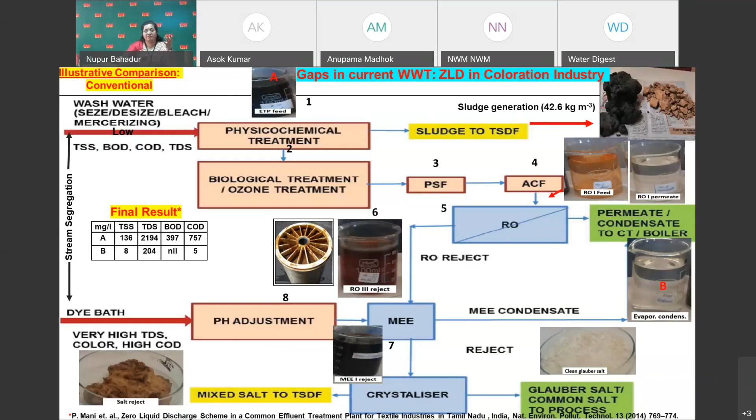So with this, the second issue of wastewater currently is water reuse. Many states have come up with water reuse policies, and now we are coming up very soon with the national policy on safe treated water. So what is it? Water reuse, we want to enhance. So the requirements are very stringent. You see, industrial treated water reuse options.

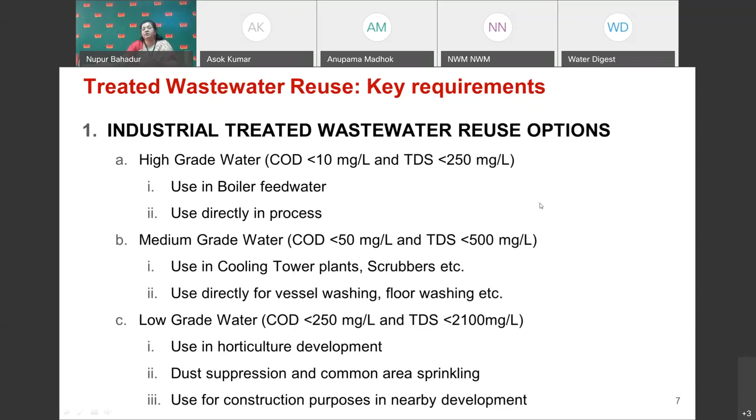If I start from low grade, these are the parameters: COD, chemical oxygen demand, and TDS should be this much. And then it would be applicable for horticulture, suppression, construction, and all. If we improve the water quality, reduce COD to less than 50, reduce TDS to less than 500, we are able to get water for cooling towers, scrubbers, directly for vessel washing, floor washing, etc. And if we further improve the water quality, make it high grade by bringing COD less than 10 and TDS less than 250, we call it high grade water, which could be used as boiler feed directly in the process.

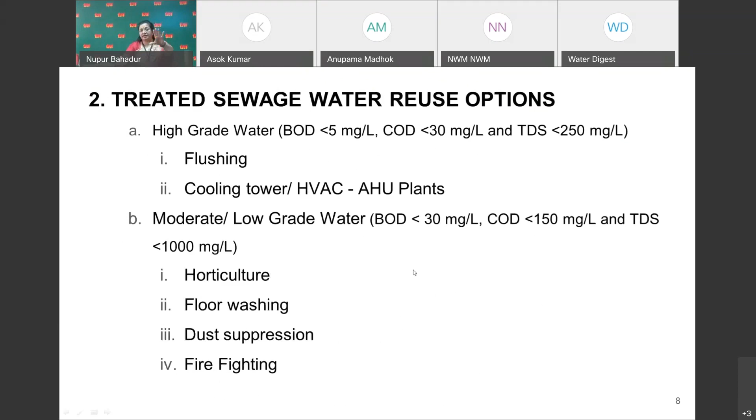Second is from sewage. Sewage water, when we look for the reuse option, again we have two options. One is the moderate or low grade water, where BOD is less than 30, COD is less than 150, which is good for use in horticulture, this and that. If we further improve the water quality to BOD less than 5, COD less than 30, we get water for cooling towers and high-end applications. So this is the target. So those were the challenges.

This is the target. And finally, I have just summarized with my understanding what we need to improve water reuse. First of all, we need to remove hardness and TDS. Second is to remove COD and total organic carbon. And third, to remove dissolved organics, the POPs or the contaminants of emerging concern or the micropollutants. Now, how well are we prepared? The next question is, having these two issues in front of us, how well are we prepared?

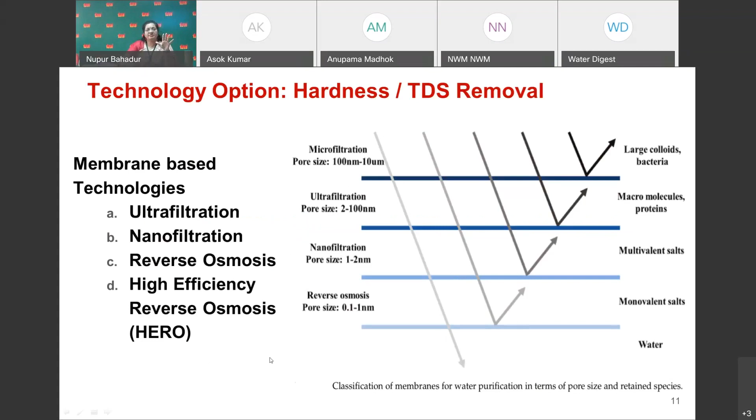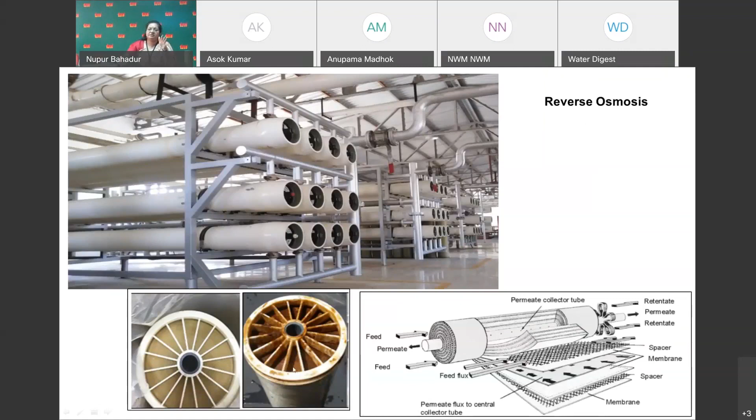I'm an optimist, and I would say yes, we are prepared. We have technology options for hardness and TDS removal. We definitely have membrane-based technologies, which are working very well. And we have all these 4 with us. And you can see here these are the pore sizes, and this is the filtration. We have things in place. We are ready for this. Here, this is just to show the audience what RO systems look like. These are huge structures, a large number of RO membranes are operative. They have spiral winding. And this is the issue, the clogged and the choked membranes as a result of treatment.

Next is, again, reject management. Again, as I said, we are prepared for reject management. We have evaporators, we have technologies. We have 3 types of evaporators. To evaporate the reject of the membrane processes and recover salts, we have multi-effect evaporators with ATFD. These are called thin film dryers. Again, you see huge structures, and these could be affordable for large scale industries or CETPs, and just see the amount of energy and the footprint they require. And this is the science behind it.

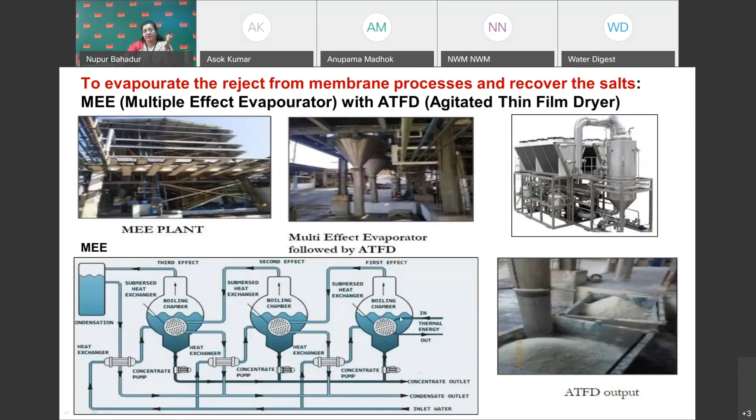Then what happens when you evaporate the rejects? You have to recover the heat which is generated in large amounts from the steam in the MEE. To recover the steam, we have MVR, mechanical vapor recompressor. So this is the basic idea behind an MVR. And again, you can see the huge structures with MVR.

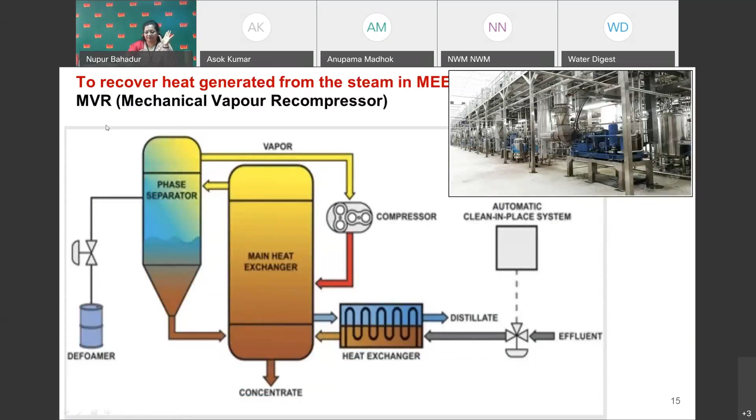Now coming to the organics, third category. To remove organics, the COD and TOC, we have biological treatment technologies in place, and they are running well. Again, I would say I would compliment the current system what we have. But now when we talk of enhancing reuse or improving the system, where comes the role of advanced oxidation processes?

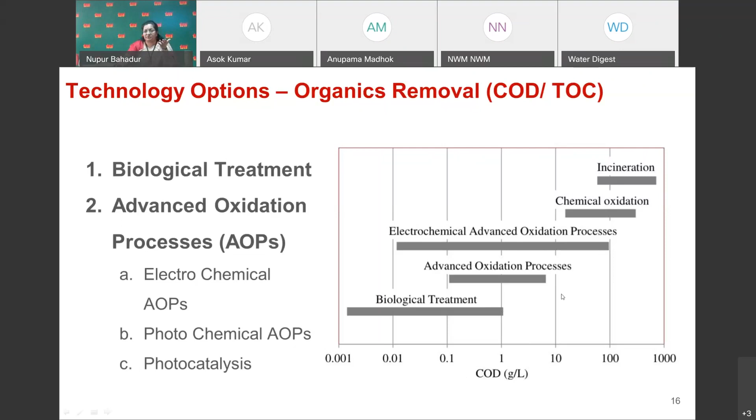You can see here the COD. To remove large amounts of COD, we have to go for the advanced systems. So here comes the role of advanced oxidation to enhance water reuse. And here is the scope. This is our trademark, which is accepted, and patent is pending.

Now, what is an advanced oxidation process, an AOP? AOP is any technology or any process which generates hydroxyl radical. So depending on the source, if the source is chemical, we call it chemical AOP. If the source is photons, the light radiations, and the chemicals involved, it is called photochemical, like the Fenton, photo-Fenton, H2O2, UV/H2O2, ozone, and photoozonation.

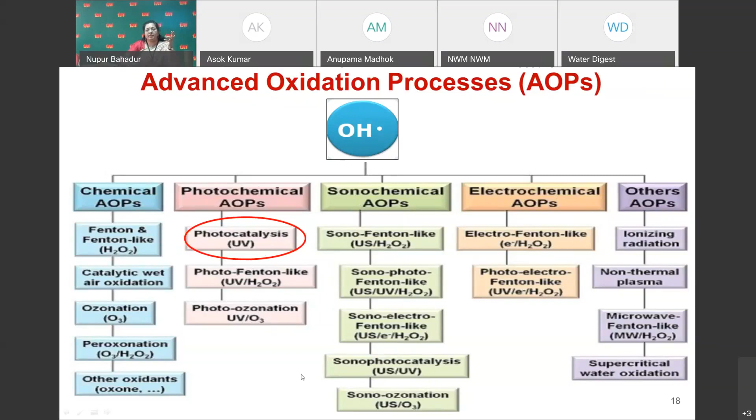And today, as a third stage of my research, so to say, I utilize both my prior experiences of PhD in photochemistry and photocatalysis and my postdoctorate in nanotechnology. And at this stage, I am applying both my experiences in water technology for treatment of wastewater. So here the science is very simple, that we make use of nanomaterials, very specific kind of nanomaterials.

They are semiconducting in nature, and in the presence of suitable UV light radiations, it is a natural property of a semiconducting material we all are aware of, that in the UV light excitation, these electron and hole pairs are generated, and in the presence of oxygen, water, hydroxyl radicals are generated, which means in situ, we are generating these hydroxyl radicals. To generate this radical, we are not using any externally added chemicals for the purpose.

For ozonation, you need ozone. For any chemical, photochemical process, you need a chemical along with the photons to get this. The beauty of this work is that if we switch off the photocatalytic reactor, the reaction stops. When we switch on, it starts. No incubation period is required for this process. And it is ultra fast. So this is the benefit and the beauty of this process.

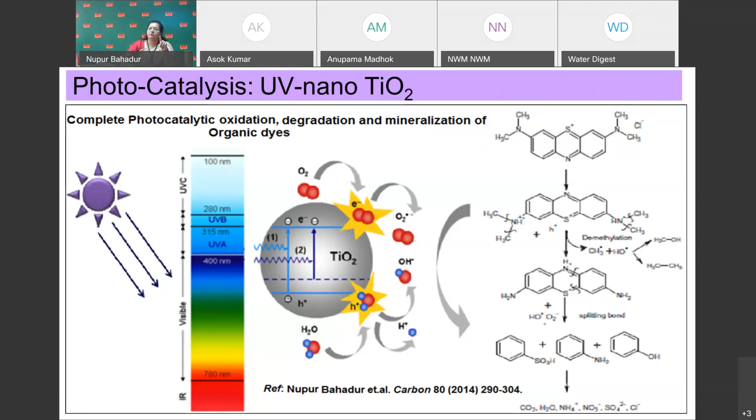And the hydroxyl radicals, this is one example from my own publication in Carbon, when they are used for oxidation, what do they do? They are oxidatively degrading the complex dye molecule or any pollutant molecule into small molecules. And ultimately, it is leading to mineralization. You can see here, the complex molecule or the pollutant is broken into minerals. This is where our current treatment technologies are lagging, where they are not treating the pollutant, they are converting the pollutant from one form to another.

Now, we have applied this simple science in the real wastewater treatment scenario. And first of all, I would acknowledge that this technology was developed under the DST Water Mission, Water Technology Initiative Program of the Ministry of Science and Technology, Government of India, through a funded project from just 2017 to 2020. So it's a new effort, a novel effort done in recent years only.

So the novelty features: first of all, we similarly have primary, secondary, and tertiary treatment, because science remains the same. But the only thing is we have to think differently. So the two novelty features are that we have involved advanced oxidation, AOP-based nanotechnology, in our secondary treatment stage. And second most important, the innovation is that no biological treatment is taking place.

So direct treatment involves the first stage. Here, the innovation component is we are not using those alum and ferrous salts. We have come up with very novel formulations, proprietary materials, to reduce the TSS up to 90 to 95% right in stage one. And once the matrix is clear, we are applying nanomaterials, giving contact time, aeration, and passing through a photocatalytic reactor having a suitable geometry, radiation, and all.

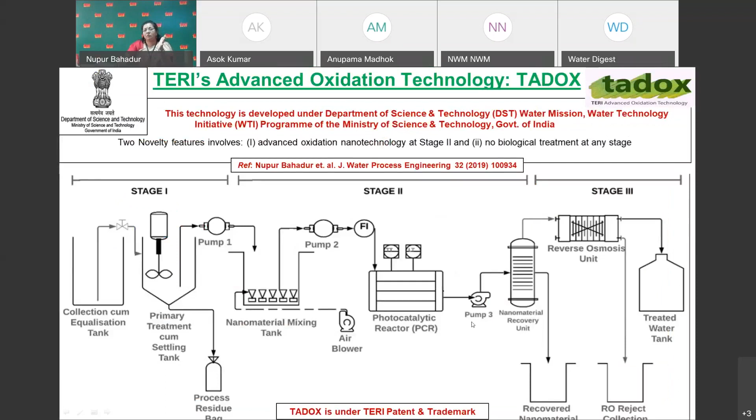Based on this, the benefits for TADOX: first, it's a clean and green technology, because we are utilizing the intrinsic property of nanomaterials to generate radicals. No external added chemicals are used for this. The hydroxyl radicals generated have a high oxidation potential, and this is 10^9 times faster than oxidation through ozone.

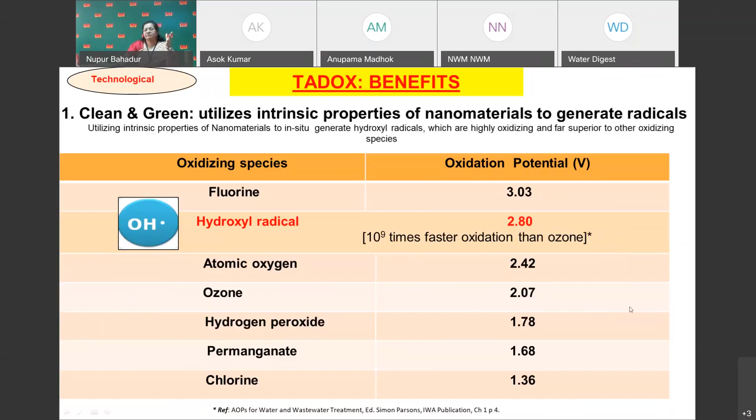So you will see in our treatment results, the treatment is taking place within a few hours. This is the first benefit. Second, we are able to completely oxidize, so complete mass balance is achieved - less sludge, no secondary pollution.

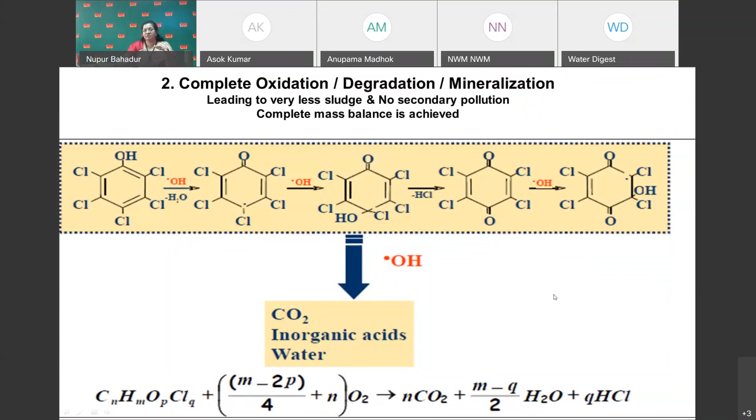Third, since hydroxyl radicals are non-selective, they can target a large number of molecules, which means the same simple technology could be applicable to a large number of effluent streams from different industrial sectors. So this is another benefit.

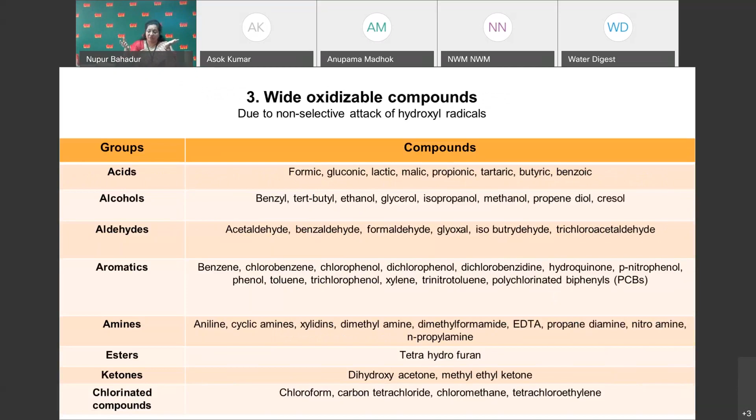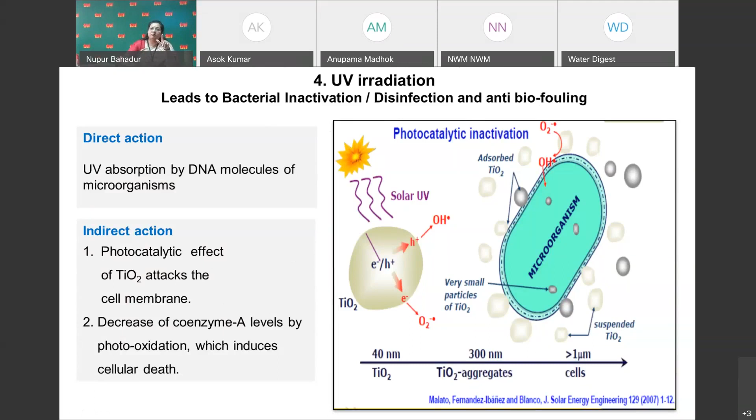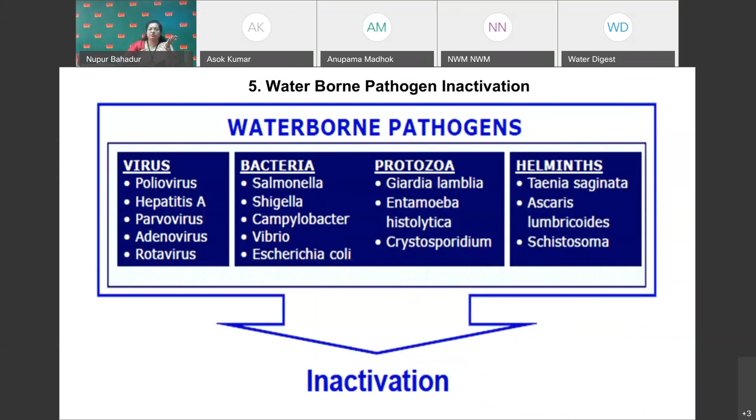Fourth, UV irradiation is taking place along with nanomaterials. We all know UV radiation leads to bacterial inactivation, disinfection, and anti-biofouling, and this is the reason we do not require biological processes, because this component takes care of that. Lastly, waterborne pathogen inactivation is a call of the time, when we have to ensure our water is also safe and healthy.

So with this background, introduction and benefits, I'm coming to the 4 case studies and the work we have done - humble work, I would say. This is just an endeavor to establish that yes, this is possible, something is working - we've established a 10 KL plant operational in TERI Gwalpahari campus. This is the message I would like to give from this platform. So here are the studies.

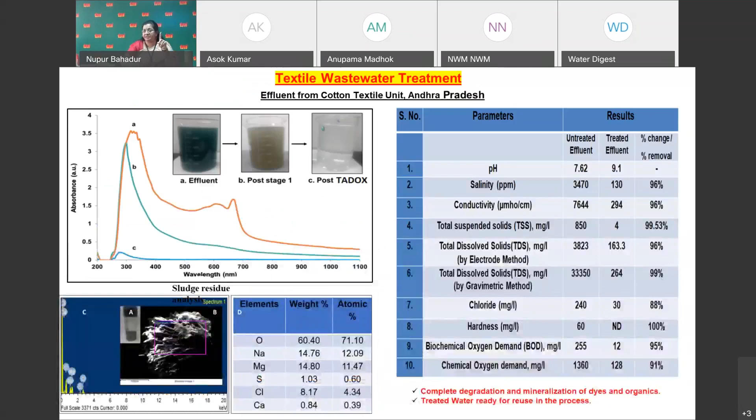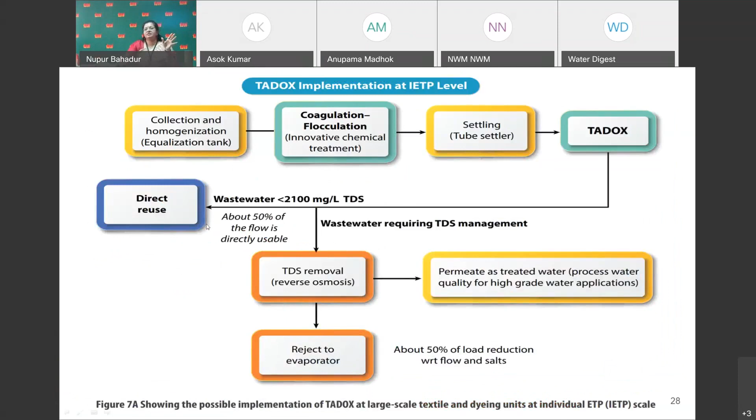If you see the water quality parameters here, what we are achieving is actually ZLD. So with this study, from an individual ETP, what we propose to industry is that for individual units in a coloration industry, we can directly go for TADOX treatment, and the water is sufficient for direct reuse. If required, then go for tertiary treatment - otherwise water is 50% available for direct reuse.

In case of a CETP, we are now working very closely with CETPs, common effluent treatment plants. This is a case of a CETP of a textile cluster from Jaipur, Rajasthan, where 17 units are bringing their effluent to a common effluent treatment plant after their primary treatment. We visited the site and did a number of experiments at different stages, and finally we went with our successful formula of treating directly.

This is a raw effluent from the equalization tank, this is our stage 1 treatment, and this is TADOX treatment - direct, you can see. Just see the spectra, and these are the water quality parameters. We don't do the testing ourselves - all these lab certificate results are NABL lab certified test reports we obtain. So here again, you can see.

So the difference between the first and second is that when we go for a CETP, we see the BOD by COD ratio, which is an indication of improved biodegradability, has improved. This means the color has gone and COD has reduced substantially, but it still needs further treatment. BOD has also reduced substantially, but still needs treatment.

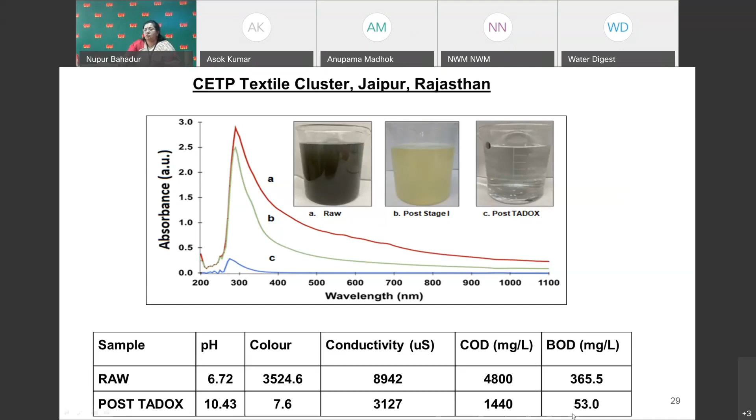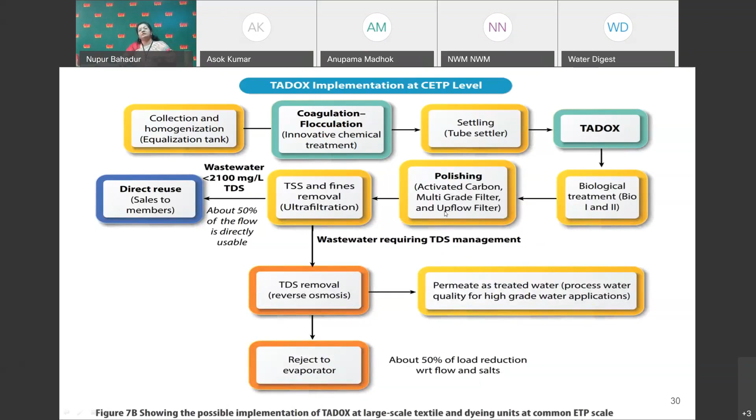So now this TADOX treated water can go for the existing biological treatment which the CETP already has. What we propose in case of a CETP is that this TADOX could be integrated into the current treatment system in order to improve biodegradability, remove COD and color right after primary treatment, so that the load on tertiary treatment stages could be reduced. So this is our outcome.

So now when we treated the same CETP treated water with other advanced oxidation technologies, as I mentioned earlier, these are the results with the same treatment time. You can see from photofenton, UV-H2O2, UV alone, and this is TADOX treatment.

And here is a very special case where we reused the nanomaterial for a large number of cycles. We are able to recycle our used nanomaterial up to a large number of cycles, and this is the water quality obtained with the reused material.

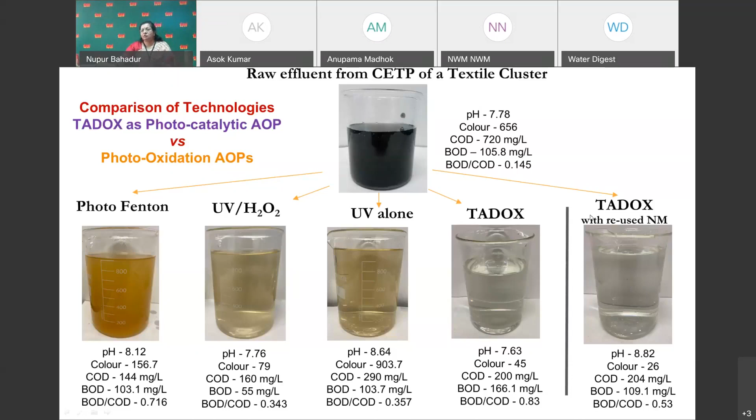We have also been a research organization primarily first, so we went for nanomaterial characterization. XRD was done at IIT Roorkee, and here you can see that the crystallinity and phase of the material remain intact, meaning the nanomaterial is not affected, and hence we get the same properties and water quality parameters.

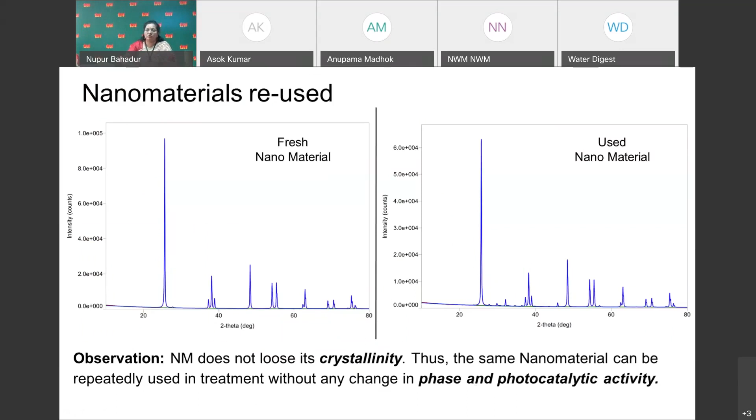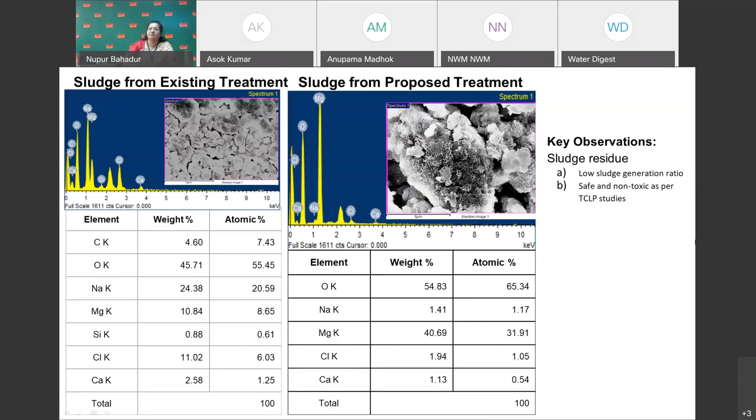We have also done sludge characterization and elemental analysis. This is what we get in the current treatment of the CETP, and this is what we get with our intervention. As I said, we get low sludge generation ratios, and as per TCLP studies, it is safe and non-toxic. So now I'm coming to other industries we have worked with.

That was one study I explained in detail. Now I won't go into details of further studies, I'll just emphasize the sectors we have touched. Based on our work, we have characterized the TADOX treatment as per requirement. We can use it at a pre-biological stage for streams with high COD, meaning high pollution load: first go for TADOX treatment to improve biodegradability, then use the existing biological system. So this is the first example.

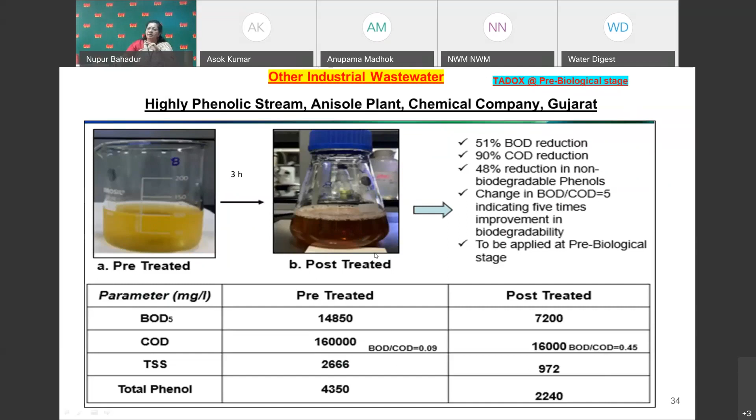This is a highly phenolic stream obtained from the anisole plant of a chemical industry in Gujarat. Here you can see the COD, 160,000, has been reduced to 16,000, a 90% COD reduction with improved biodegradability of 4 to 5 times. Now instead of this yellow colored water going to the biological system, this treated water will help in further reduction of the parameters.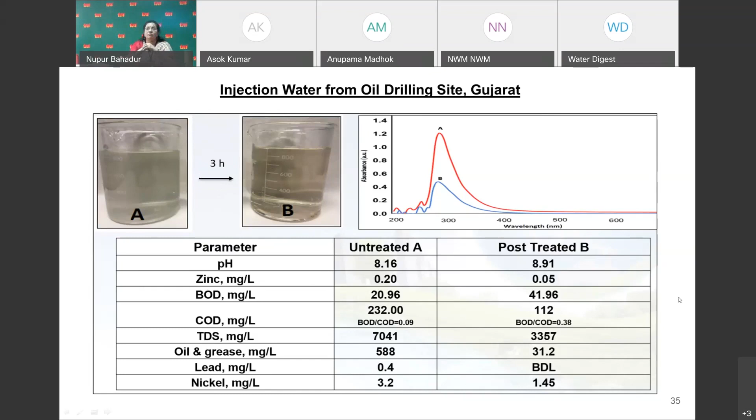Now this is very interesting, the category changes here - this is post-biological. For streams with very large BOD, such as distillery, dairy, paper and pulp, we can go with the conventional biological system first, and after biological treatment, go for TADOX treatment to remove the lignin, melanoidins, or dissolved organics in them.

This particular example is tertiary treated effluent we received from a pharmaceutical company in Uttarakhand, and this was the water being discharged into the Ganges. Here is our direct TADOX treatment in just 3 hours, and this is the resulting water quality.

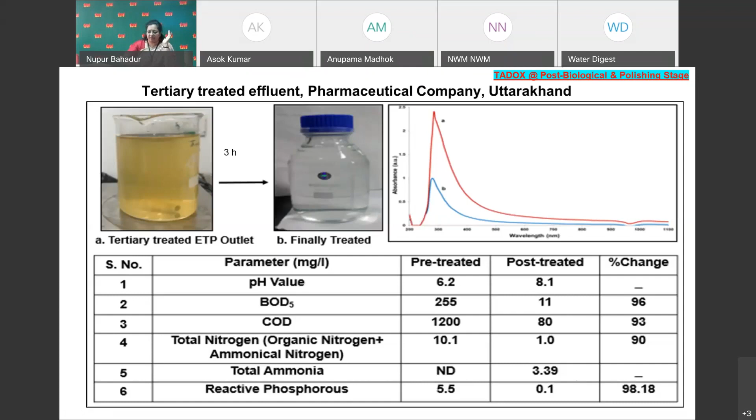One important feature I would like to highlight is that ammonia and these parameters, which were not detected in the pre-treated sample, were detected in the post-treated sample, simply because now the complex molecules are broken and it is detectable.

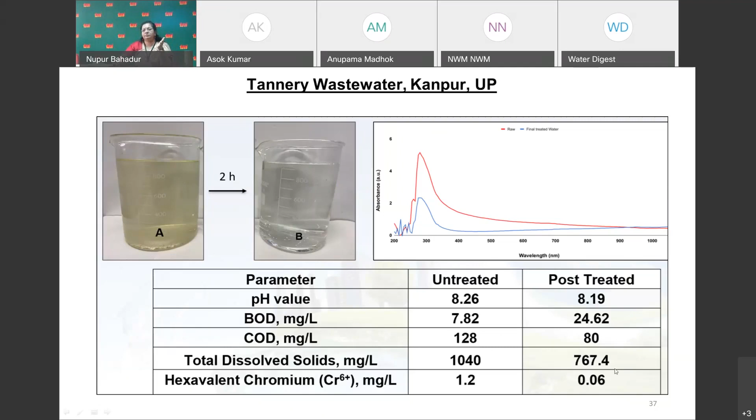Here you can see the water quality parameters. This is an effluent from a tertiary treated source, and in these last two cases, I would say you can use TADOX at a post-biological stage or at a polishing stage.

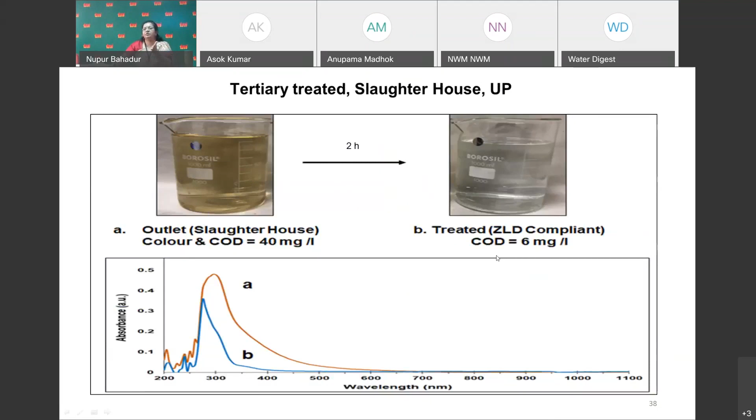This is an example of a slaughterhouse in UP. This is the finally treated water. You can see COD is less than 50, but color is still not going. So for such a stream, we can have TADOX at a polishing stage, and with just 2 hours of polishing, the COD is reduced below 10. What else do we need? So that was all about the industrial wastewater, the common industrial streams.

Now I come to the difficult wastewater, which really needs advanced oxidation. These are those difficult streams where the company comes and tells us that they have tried all existing technologies, and then they are coming to test TADOX. This is the stage, so therefore I have specifically kept these 3 cases as a separate category of difficult wastewater.

So this is distillery slop, MEE condensate. Now I'm coming to the difficult wastewater, the MEE condensate. What do you do with it? If we have to achieve ZLD, we have to think about the MEE condensate.

So this is our intervention, and this is a very recent study from the last 3-4 weeks. Of course, as I repeatedly say, we have to improve further, but here this is what we could at least establish: that this is possible.

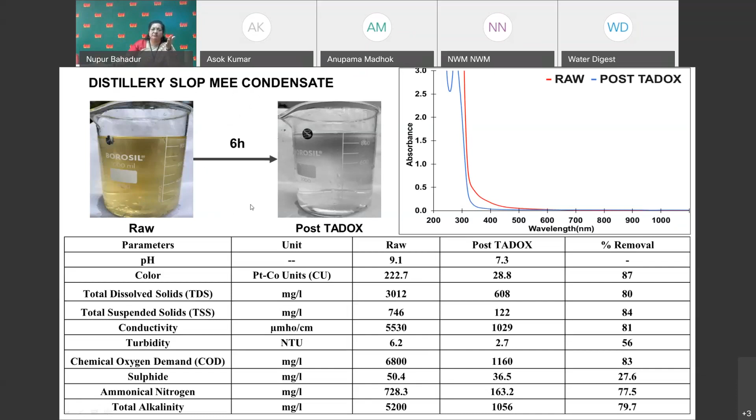So here you can see distillery slop, MEE condensate, ATFD condensate. These are the real issues in achieving ZLD which industry, and big industries, face. You can see the color is not going, COD is very high, and it cannot be disposed of.

Currently, very sorry to say, and from this platform I would like to say that we have to have stringent regulation, and industries have to be very responsible. They cannot discharge their untreated or such kind of water into the sea or other sources.

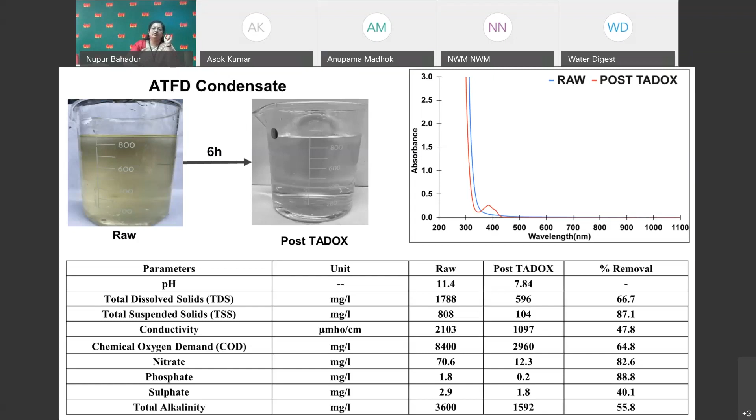Last in this category is the MEE condensate. You can see here the color, the COD, and here this is what we achieved.

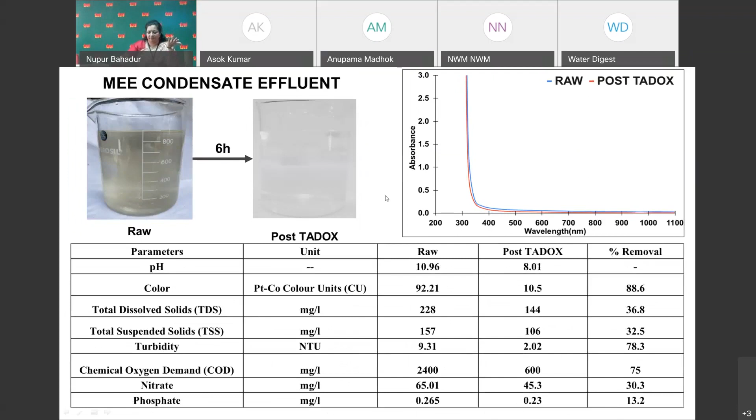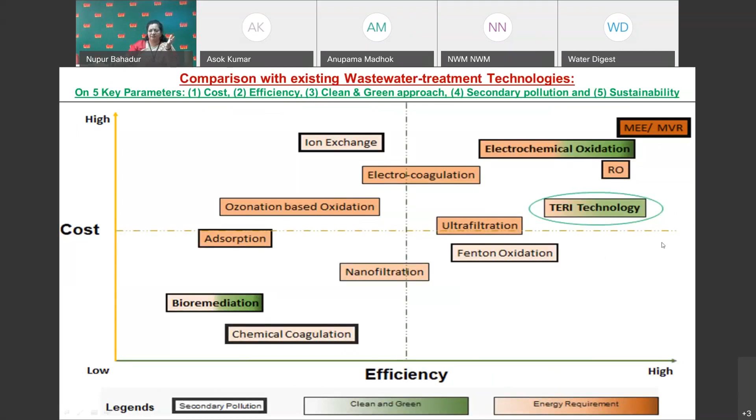Now coming to municipal sewage, and here comes the innovation. I'm very glad to share that municipal sewage, which is considered a very simple stream, has for ages been treated using biological processes, and fine, things are going fine. But as I say, the problem is: what are the challenges?

When we talk of modern day municipal sewage, it is not just sewage, because the plants, the STPs which were built, were built long back as per the sewage of that time. But now modern day municipal sewage contains not just sewage, it contains untreated or partially treated industrial effluents. It contains POPs, micropollutants, various drugs, and runoffs which are mixed into the streams. So therefore, it is a complex stream, and that's why I have kept it in the study.

And again, the third issue is that when we talk of sewage, it has less shock-bearing capacity. The STPs have very little shock-bearing capacity. The treated water finds use mainly for horticulture purposes, and we cannot think beyond that. We are very happy about it; it is good, what we are doing is fine.

But again and again, I'm saying my whole endeavor is to enhance water reuse for high-end application as well, if it is possible, as we can see is possible here. So currently, the treated water is definitely being used for horticulture, for dilution here and there.

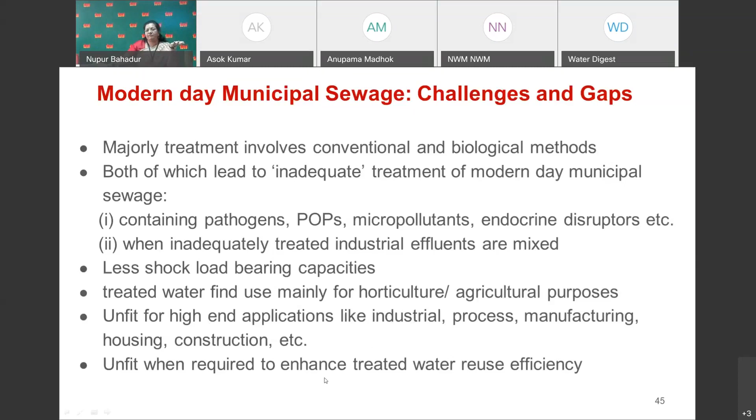But the water quality testing has to be robust, and we have to see whether the water is hygienic and healthy, which is going for horticulture or agriculture or gardening and all. So it is unfit for high-end application, as I said, when we need high-end application and reuse. So here I will just show one case study.

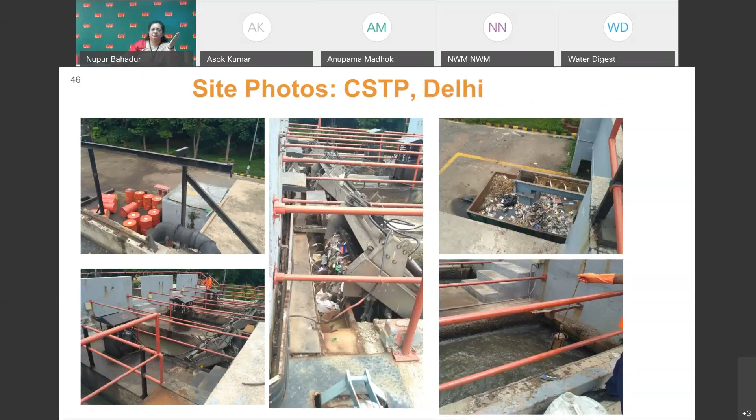We visited a common sewage treatment plant in Delhi. We don't name any industry, we don't name any organization. The whole idea is just to present the case. So here you see, on the left corner, the raw sewage of a sewage treatment plant in Delhi. And we studied this in terms of biological parameters, microbiology parameters, physicochemical parameters, and micropollutants. And I'll show it in 4 slides.

The first and biggest innovation component: on top you see the current treatment which is taking place, using conventional technologies, ASP-based technologies, then passing through filters and all. So this is conventional, which takes this much time. So with our experience on industrial so far, we tried our science on sewage. There are 2 possibilities we explored.

First, whether we can polish the current treated sewage, which we did on the top right. We used TADOX, direct secondary stage TADOX, on the treated municipal sewage of the CSTP. And this is what we get, 3 hour treatment, post-biological at a polishing stage. Then we thought, let us try to treat the inlet directly. At the bottom, you see we treated the inlet of the sewage directly, which means no biological treatment, which means a reduction in time, just imagine.

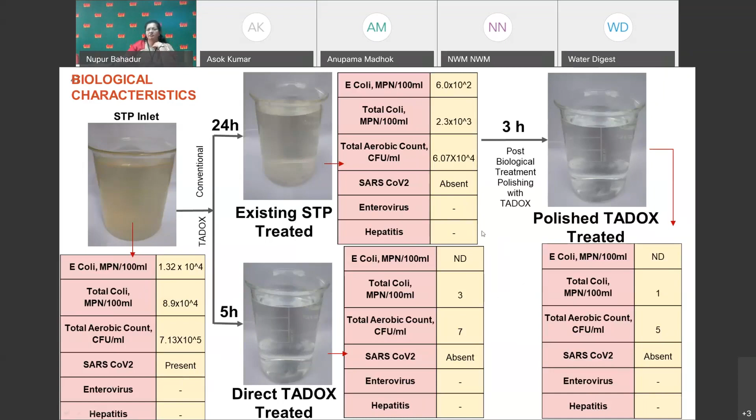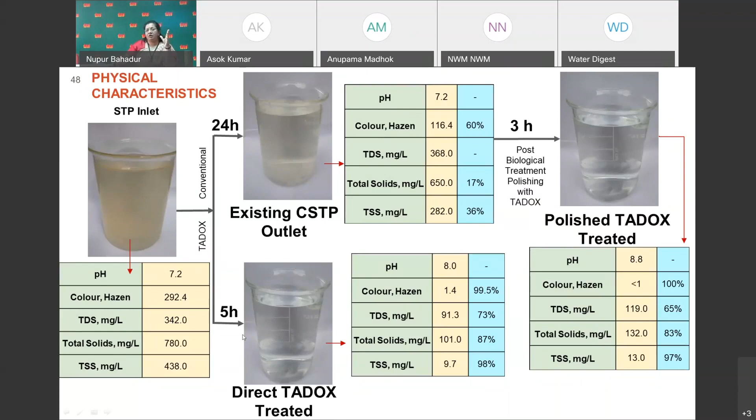These are the biological parameters. This was the work which we have done. We saw the presence of SARS-CoV-2 in the raw sewage. Of course, this treatment plant is running well, and no SARS was found in the post-treatment, and obviously not in TADOX. Second is the physical parameters: pH, color, TDS, TSS, and total solids, with the same approach. TADOX polishing of the treated sewage, and direct TADOX treatment of the inlet of the sewage, and the water quality parameters.

Micropollutants are a very important component because in India we do not have any prescribed limits for micropollutants, whereas a few European countries have come up with legislation on that. So from this platform, I would also like to appeal to the government to work on micropollutant limits. And here you can see, we have chosen the most common micropollutants which could be found and which are reported. These are different classes of micropollutants.

One is very common. These are amongst different micropollutants. And the same approach you see here: the current treatment, which is leading to these parameters, and this is TADOX treatment, which is removing a few micropollutants up to non-detectable limits, you can see.

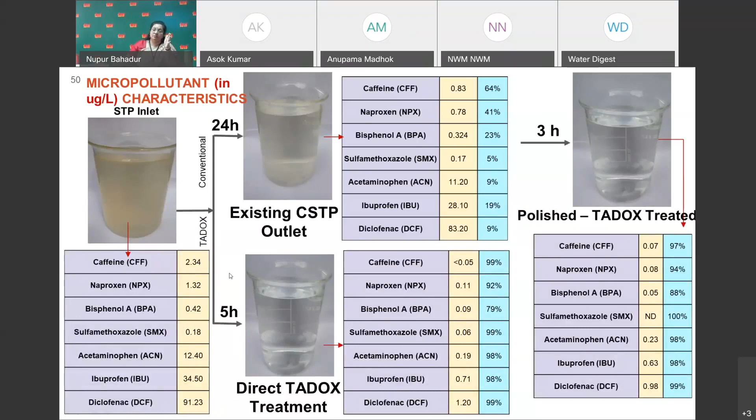So this is one case study of municipal sewage. And as I said earlier, this is the real innovation in the space of sewage treatment. Fourth and last category is the wetlands. See, wetland treatment is very good, very cost effective, and it is fine when we have large spaces and things. And for a country like India, if it is possible, we should go for such wetland approaches. And again, there is no harm.

But again, when we come to enhance water reuse, we thought that we could possibly enhance the water quality of the wetland treated water. So with that endeavor, we did this study. And the fourth identified problem is the open drains. So here, our own TERI Gwal Pahari campus is a huge 100-acre green campus. We have research labs, a retreat facility, golf course, cricket ground, student residential facilities, hostel, canteens, everything.

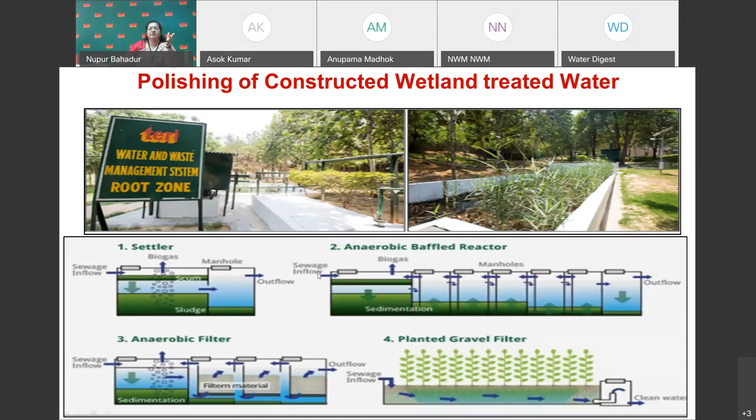And we have 3 sources of wastewater, and they are treated using 3 different methods. One of them is the root zone treatment. So here you can see the root zone treatment is taking place in a large area. And we all know what happens in a root zone treatment. What we did, this is the RZT, root zone treated outlet water. And again, we used direct TADOX treatment.

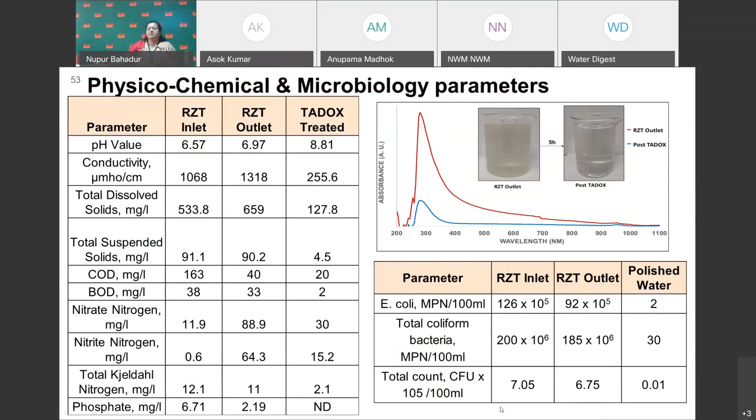Here you can see the parameters, the RZT inlet which is going for the root zone treatment. And this is the root zone treated water. And this is the direct TADOX treatment which is taking place. Again, you can see the physicochemical parameters, the microbiology parameters, and of course the micropollutants. So here we can see that wetland or root zone treated water is able to achieve some extent, but probably it is not effective for micropollutants, while the TADOX treated water can be a solution to enhance water reuse for wetland treated water.

Fourth and last study is an open drain. So this is a very common problem we face in a large number of places in India. A drain is passing through a campus, a residential colony, wherever you see. So it is not just an environmental hazard, it is a health and occupational hazard as well. We have to understand it. So what to do? With that point, we studied a drain passing through our campus, and we got this.

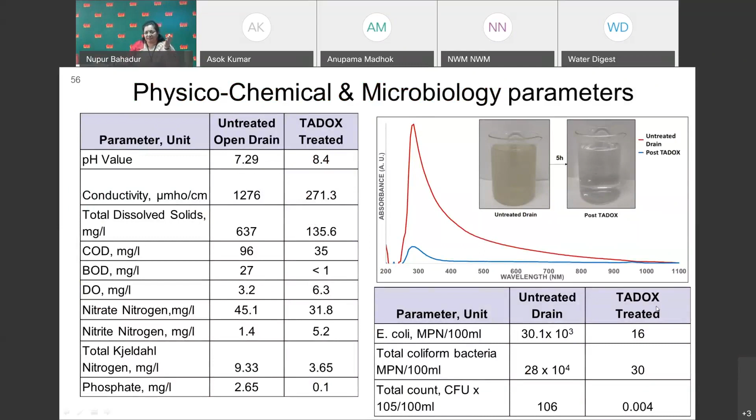So similarly, this is the effluent of an open drain and the direct TADOX treatment. And in the untreated open drain, just imagine the parameters. These are the parameters, microbiology and the micropollutants. These are beyond imagination in an untreated open drain, and we all know where this water is going. So many people are using this water with minor treatment or no treatment, and what are we doing with our health, environment and sustainability? And with the direct TADOX treatment of such micropollutants, just see the parameters.

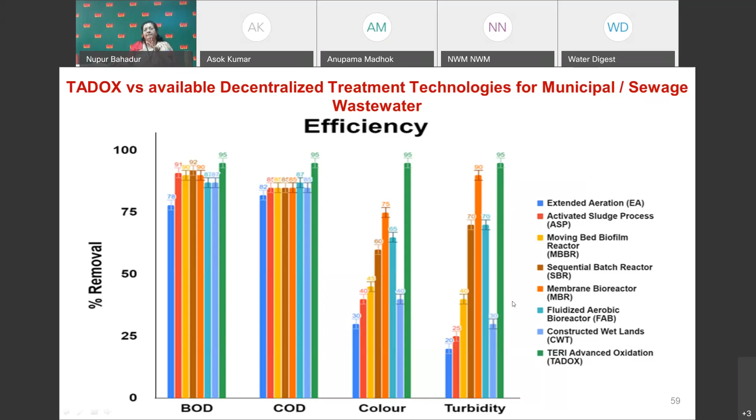And with whom are we comparing? This is important. We are comparing with the best in the existing scenario, the MBR, the water quality obtained from an MBR. So we are comparing our water quality with this system. Here we are comparable in terms of power, but the other benefits you have already seen.

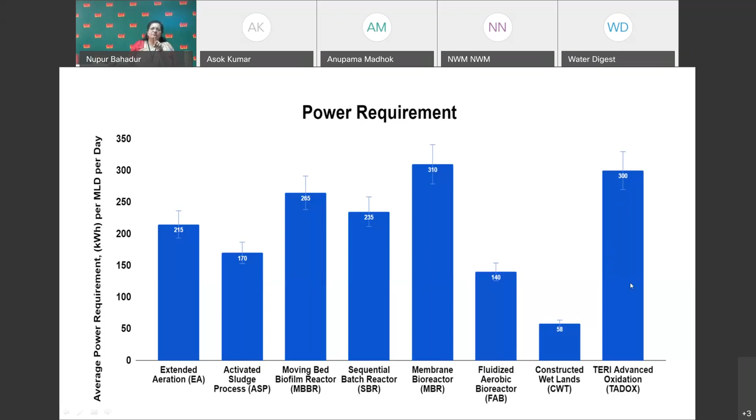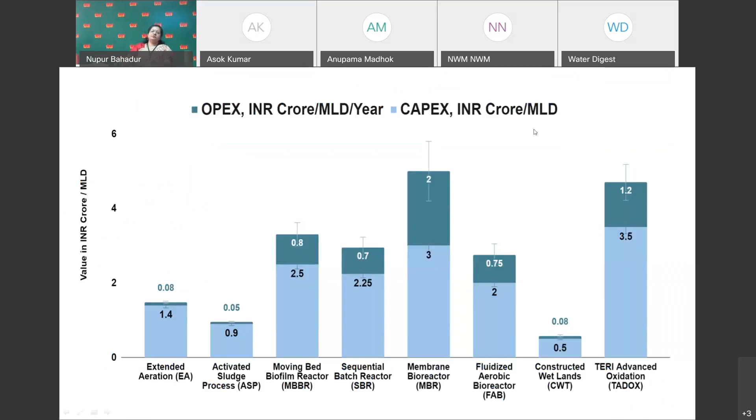When we compare, these are the estimated costs. Once TADOX is applied somewhere, then we can get the realistic figures. But definitely, this is validated data against the existing systems. We see a 20 to 25% reduction in CAPEX and a 30 to 40% reduction in OPEX when we use TADOX for this treatment. Now, looking at the benefits, I would say the application areas are wide. Science remains the same, technology remains the same.

On application areas, we started with one project which was granted for textile wastewater treatment, but we could do so much from this one small project that we could test it in a large number of streams. And then the clean and green approach: you have seen very limited use of chemicals, negligible and non-toxic sludge, no secondary pollution issues, and disinfection is already taking place. On water quality, we are able to achieve ZLD and surface discharge water qualities. And in many cases of municipal sewage, we are able to achieve CPCB class A grade water as well.

So efficiency, you can see in terms of time, treatment time is a few hours, a really resource and energy efficient technology. And why energy efficient? Because it is helping to reduce the load on tertiary treatment. Therefore, it is energy efficient. Then, of course, the low CAPEX and OPEX, as I have stated, and small footprint.

It could be retrofitted at larger scales of 500 KLD, MLDs and all. Also, because reactor modules are there, it could be taken at small units also, 50 KL, 200 KLD. This way also we can work. So therefore, it is a modular, integrated and retrofittable technology. It could be used in existing systems and of course in newer projects.

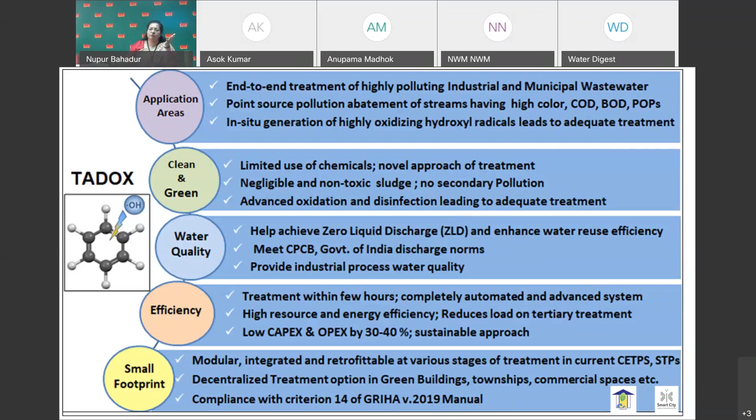Then compliance with criterion 14 of the GRIHA manual, which is of course a product of TERI. So a 5-star rating is given based on some criteria. So such a novelty component could also add a rating in your GRIHA. And of course, in smart city projects, this could be integrated.

Now, whatever has been developed in the last 3 years, with this outcome, from 1st April 2021, I'm glad to share that we have a dedicated new area within the Water Resources Division of TERI, which is called TADOX Technology Center for Water Reuse. For the last 3 years, whatever I presented are published, peer-reviewed, international results. You can see the latest publications with high impact factors and citations as well.

A very important aspect we are also studying, I would like to tell you, it's not just about water treatment and reuse. Being a responsible scientist, I also have to see what is the effect of the nanomaterial which we are using, how good is the quality of our treated water. So for that, one dedicated PhD is on the eco-safety aspects for plants and aquatic life.

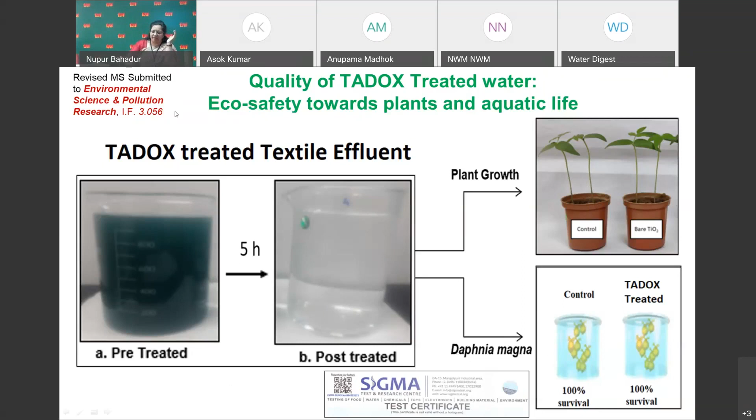So we are using our TADOX treated water in plant growth, horticulture. Plants are growing well. And also Daphnia magna survive, which is a CPCB requirement for seeing the effect. And this work's revised manuscript was submitted yesterday in Environmental Science and Pollution Research.

These are the media articles, and we launched our technology in September 2019 and completed the work in 2020. These are some recognitions and awards for the technology. And this is the 10 KLD functional TADOX plant in TERI Gwal Pahari in the Gurgaon campus, recently inaugurated by our DG.

And we are really honored that we got great encouragement, and this technology was presented in India Water Week in 2019, and from that platform, this technology was chosen and encouraged by NMCG, the National Mission for Clean Ganga. And we were given a few sites. We went there, worked there, presented our findings, and we have recently signed an MOU with the National Mission for Clean Ganga to start with pilot demonstrations across a few sites in the Ganga belt.

Recently, we did an online training and capacity building certificate program on treated wastewater reuse, which just finished on 22nd March. And on World Water Day, we also came up with our first policy brief on TADOX to treat textile and dye wastewater. And these are R&D based policy recommendations.